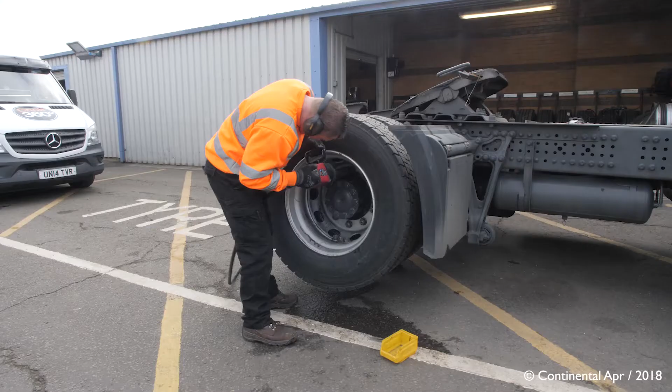What's more, if your vehicle does suffer from a detached wheel, your operator's licence could be at serious risk. That's why you need to stay on top of wheel fixing procedures and get it right each time, every time. During the course of this training video, we'll be showing you how to safely remove, service and remount a wheel on a truck, trailer, coach or bus.

And remember, if at any time during this training video there's something you don't understand, stop and ask your supervisor for further explanation, because you cannot have learning without understanding.

It's important to ensure that when a vehicle's booked in for a wheel removal, that everyone knows the correct procedures. That means parking it in a safe environment and above all else ensuring there's clear signage showing it's not to be taken out onto the road under any circumstance. It also means informing your site personnel in the traffic office and via the driver's notice board that the truck is not in service. When mounting or removing the wheel, be sure you follow all the standard working practices.

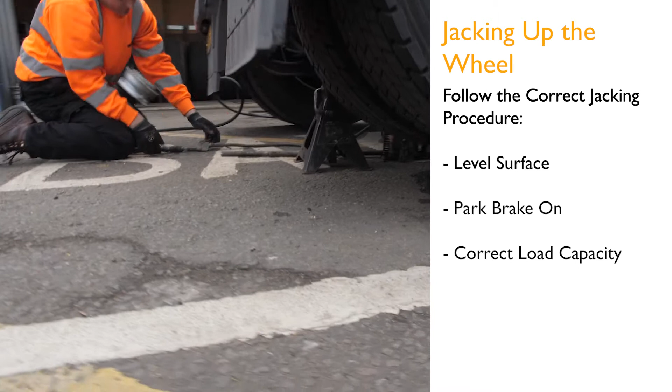For example, the initial lifting of the vehicle must be carried out using the correct jacking procedures. That means ensuring it's on a level hard standing surface with the park brake on and using a suitable jack with the correct load capacity. And if you've never removed or remounted a commercial vehicle wheel before, you must be properly trained to do it by a qualified tyre technician before starting the work.

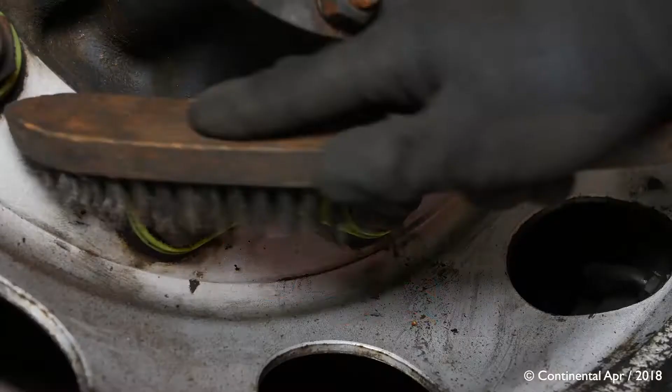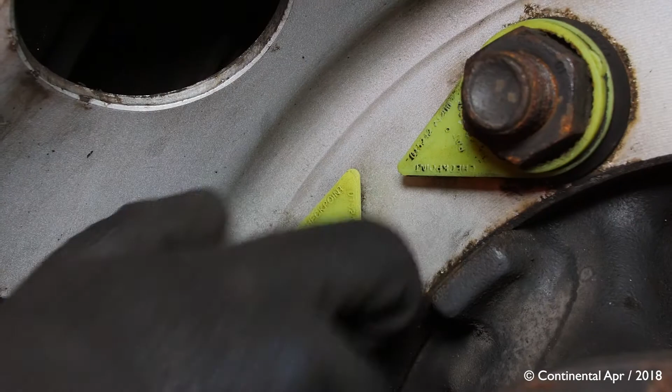First of all, before unbolting the wheel, make sure you clean the exposed threads of the studs with a wire brush or lightly lubricate them. Next, visually inspect the wheel assembly and check for any evidence that it may have been operating in a loose condition. If there are signs that a tyre has substantially deflated or has stood in a deflated condition for some time, the tyre or wheel components might have become damaged or displaced.

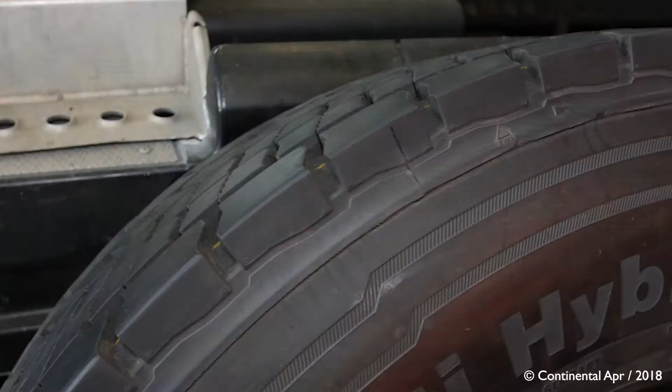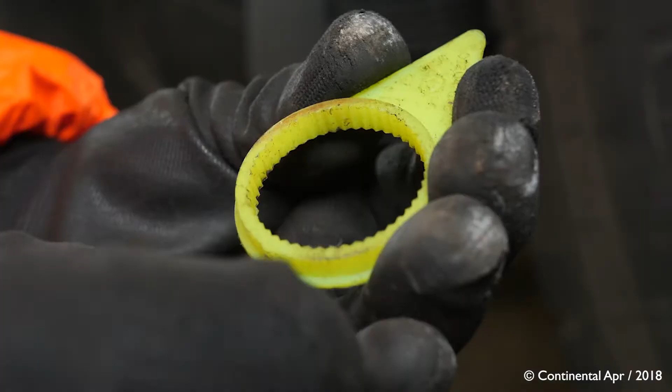If that's the case, remove the wheel assembly from the vehicle and the tyre from the wheel. Obviously, you'll need to examine the tyre to see why it's deflated and whether it's suitable for further service. And remember, each component part of the wheel must also be examined and replaced as necessary before being reassembled.

Now, in the case of aluminium alloy wheels, excessive heat from either a fire or a brake malfunction or a wheel bearing failure or a tyre failure or indeed any other cause could weaken the metal and render the wheel unserviceable. So if you do suspect an alloy wheel has been damaged by excessive heat, it must be removed from service immediately.

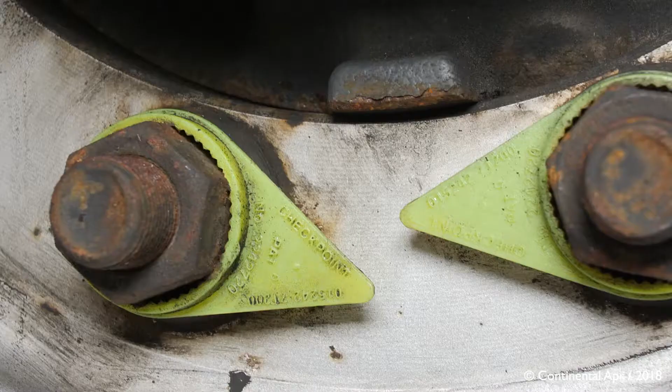Now it's time to make sure that any other loose debris around the wheel is removed, again using a wire brush. And if wheel nut indicators are fitted, check to make sure they're in the correct position. If they're pointing the wrong way, that could well be early signs of a potential defect, so you need to be vigilant for any abnormalities.

If the wheel is cracked or damaged, remember to deflate the tyre before attempting to remove the wheel. And should it be difficult to remove a wheel from the hub or drum, under no circumstances whatsoever ever hit the wheel rim directly with a heavy hammer. To remove a wheel, you should always use the suitable tools designed for the job. And if those tools aren't available, a protective wooden block and a soft-faced mallet may be used, but only with caution.

Once the wheel has been lifted off the ground, unbolt the wheel nuts with the air gun, making sure to follow all standard working practices and keeping the wheel nuts in a safe and secure environment so you can inspect them later. If you do experience any excessive tightness or difficulty in removing the nuts, this could also indicate a potential wheel security issue.

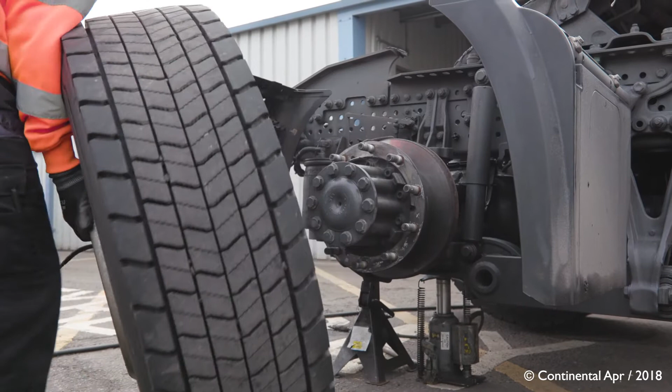Next, carefully remove the wheel from the hub assembly in line with manual handling procedures, taking extra care not to damage the stud threads on removing the wheel, whether it's a single or twin wheel assembly. So use levers or a cradle to lift and pull the wheels squarely off the hub. Finally, take the wheel away from the vehicle and fully deflate the tyre before carefully removing it from the wheel so it can be serviced and inspected.

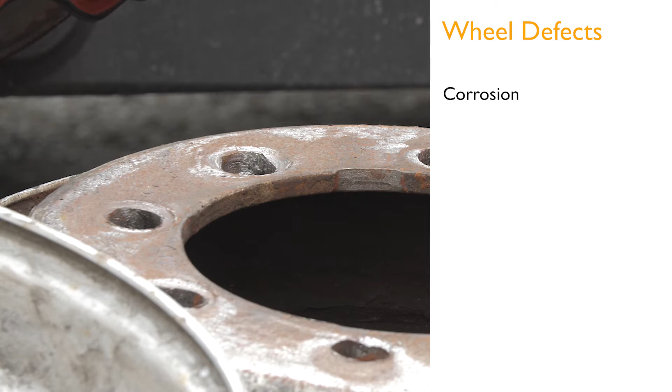Now that you've removed the wheel, you need to ensure it's safe and serviceable and that you've thoroughly checked it for any defects. And remember, any signs of damage or wheel deterioration, no matter how small, should be reported to the customer's maintenance supervisor. When inspecting the wheel, look for any signs of corrosion or pitting and remove any light rust with a wire brush.

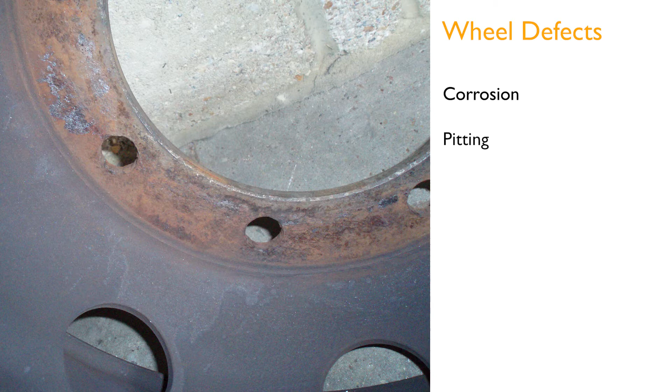If there's still any heavy pitting or corrosion after you've cleaned it, withdraw the wheel from service immediately and report it to the customer. Also, check for excessive wear around the centre bore of the wheel. Any significant wear in this area should also prompt the wheel's removal from service.

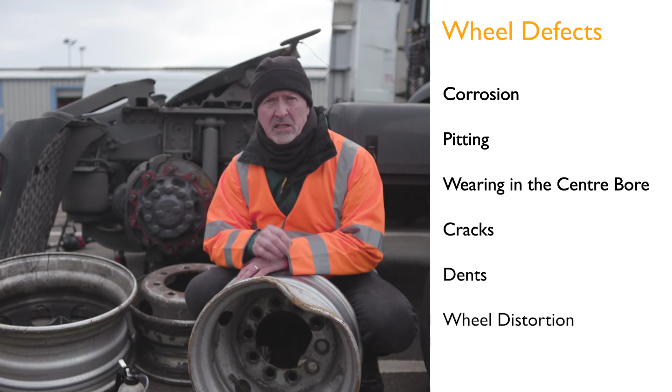And don't forget to closely inspect the wheel for any cracks or dents or wheel distortion too. And regardless of whether the damage is large or small, it won't be fit for further use in operation and the wheel should be taken out of service immediately. Once again, report this to the customer for further action.

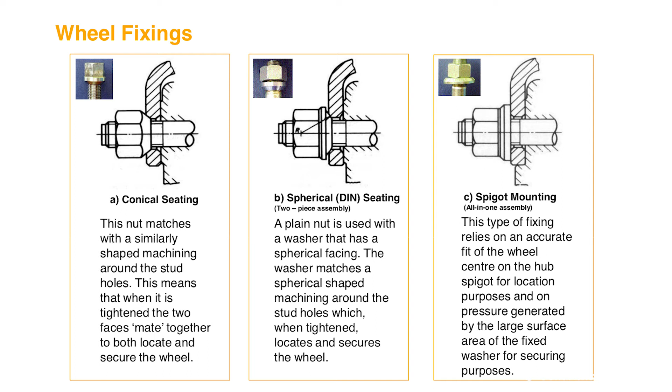However, if the wheel is undamaged and safe for operational use, a tyre can be refitted to it. But if you do find any defects, you must remove the wheel from service immediately and make sure it's not reused in any capacity whatsoever. Finally, remember that the replacement wheel should always be to the same wheel fixing type of the original, and pay attention to any further customer specific policy that could be in place.

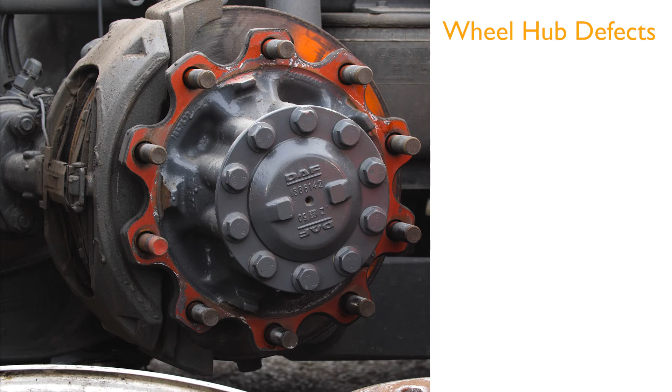Now that we know the wheel is operational, we can check the wheel hub. Firstly, inspect for any signs of worn spigots. This will be indicated by the wheel not centering correctly, which will cause an imbalance of the wheel, in turn vibration, resulting in loosening of the wheel itself. The spigots should also be free from loose material, corrosion, or any damaging defects.

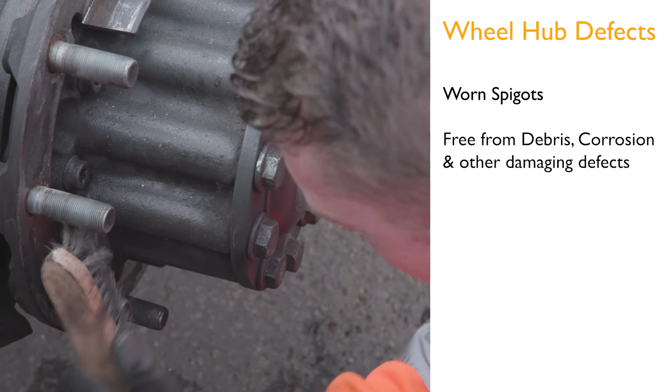Use a wire brush to remove the debris from all the areas of the wheel hub, but especially around the spigots and the mating faces, which should be spotlessly clean. If there is corrosion that can't be removed, or if there's any other damage, you must report it to the customer immediately and have the vehicle removed from service. If you're still not sure, contact the site, as it's better to have a vehicle parked up safely for further inspection than to have it involved in an avoidable accident out on the road.

You should now clean the wheel studs thoroughly and inspect them for any damage, for example, distortion, elongation, cracking or excessive wear to ensure they are reusable. And if they have been damaged, remove the vehicle from service and fit new wheel studs. Once again, make sure the customer knows that they're being replaced and that you've obtained a defect number.

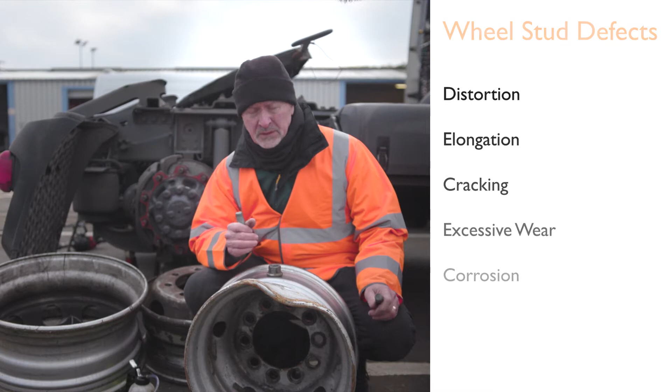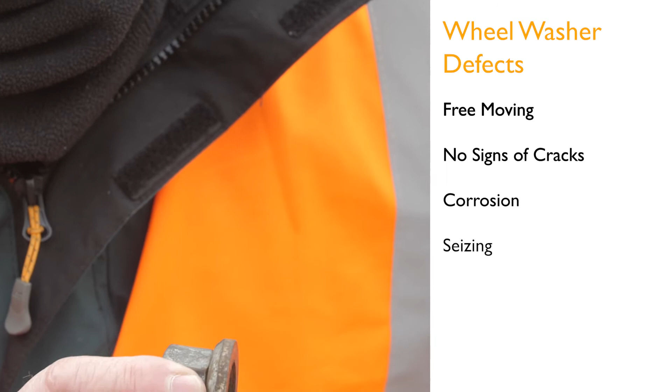Also, check the washer element of the nut. These need to be free moving and show no signs of cracks, corrosion or seizing. Also check the nut itself to ensure it's free from debris around the threads and that there are no signs of any damage. Remember, it's important that the nut should be able to move freely over the entire length of the stud when tightening by hand. And if you do need to replace the wheel nut, only use those that meet the original material specification.

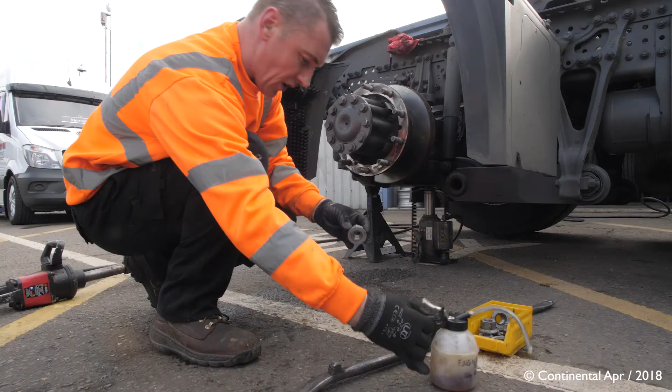If you find any of these defects on a wheel or its component parts, you must contact the fleet manager. More importantly, if you're ever unsure about a wheel's condition, contact a fleet manager, because it's better to act on a problem now than leave it to develop into something more serious later. Finally, if all the component parts have either been correctly serviced or replaced, you can now begin remounting the wheel back onto the hub.

Remember, before remounting the wheel assembly, ensure all the areas around the wheel and hub are thoroughly cleaned to ensure the mating faces on the wheel nave and the wheel hub are free from debris, as dirt or rust could end up between the mating surfaces and prevent sufficient clamping forces when the wheel nuts are tightened.

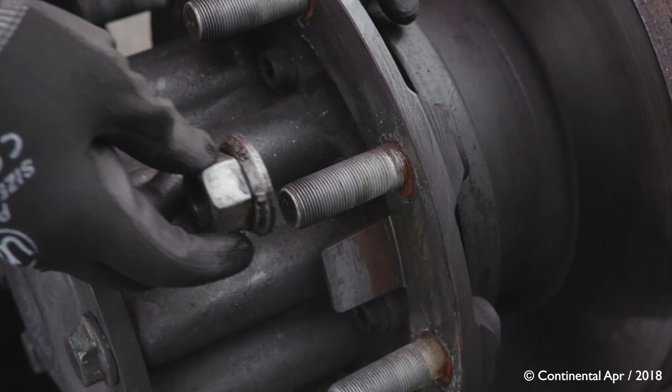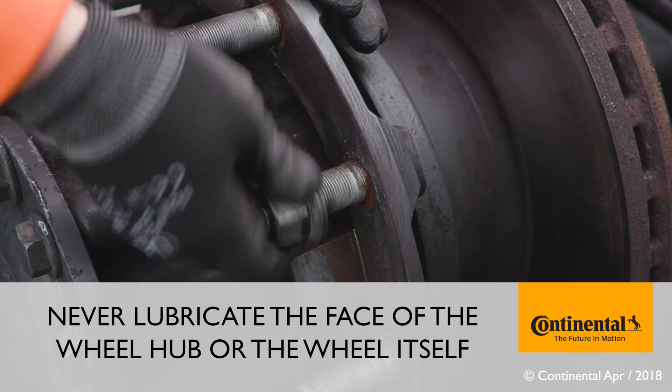Also, we need to make sure that the threads on the studs can reconnect. To check this, apply a recommended amount of lubricant to the end of the threads on the studs and nuts, unless otherwise instructed by the vehicle manufacturer, whilst making sure you don't lubricate the face of the hub or the wheel. In other words, lubrication should only be applied to the nuts and the studs. Once again, if any components are found to be damaged or unserviceable, replace them accordingly and obtain a defect number.

Now, carefully refit the wheel to the hub, taking care not to damage the wheel studs and threads, and making sure the valve access is aligned if twin wheels are fitted. Make sure also that you follow all standard working practices when doing this.

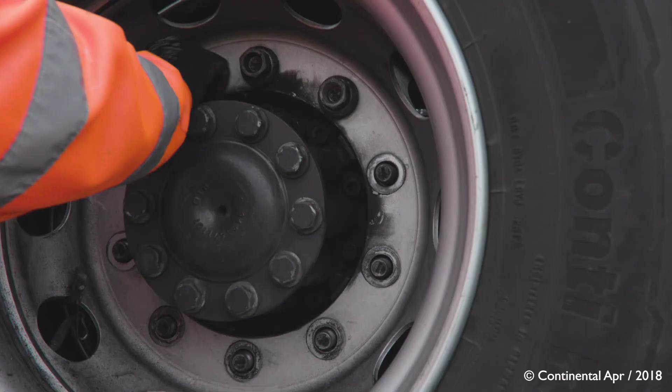Refit the wheel nuts manually over the full length of the stud, and if any excessive tightness is encountered during this process, then the stud and nut must be considered unserviceable and they should be replaced. And if an air tool is used, it's advisory to have it at the lowest setting. Above all else, never use an air tool for the final tightening.

Once the wheel assembly has been remounted on the hub and ensuring there's no damage to the studs, either hand turn the nuts onto the studs or use an appropriate wheel brace. And once the wheel assembly is secured on the hub, torque the nuts using a properly calibrated torque wrench, tightening the wheel nuts in the correct sequence. This tightening should occur after you lower the vehicle back to the ground. And remember, never be tempted to over-tighten as this will stretch the stud.

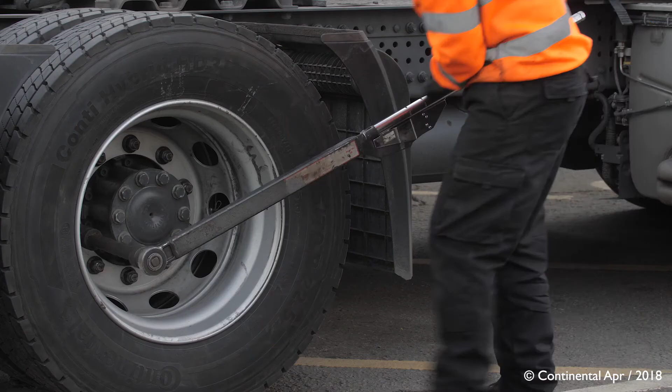On HGVs, after the initial wheel tightening has been completed, it's possible there could be what's called settlement in the studs. That's a relaxation of the clamping forces on the wheel. Therefore, it's vital that you repeat the torquing procedure after leaving the vehicle to stand for at least 30 minutes or after it's travelled for a distance of between 40 to 80 kilometres, 25 to 50 miles.

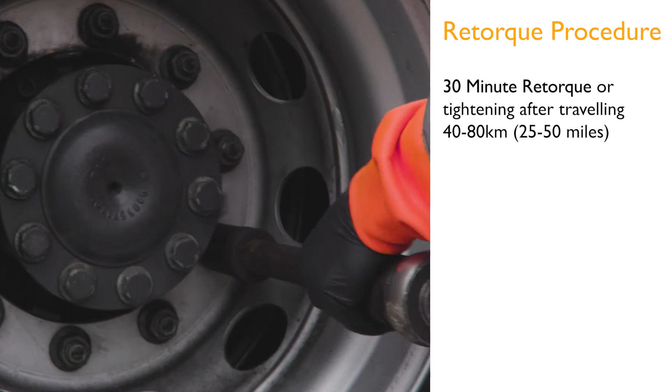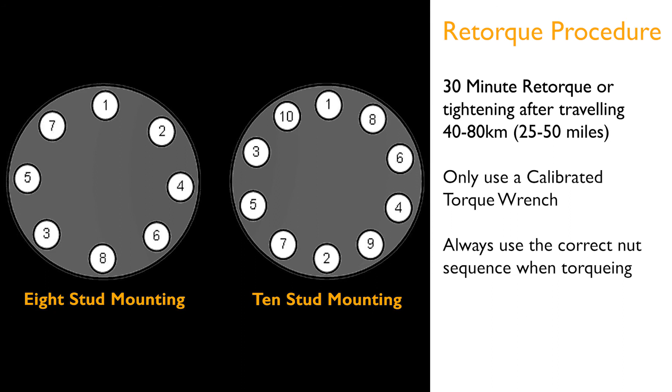Again, only use your calibrated torque wrench and not extensions or wheel nut spanners and spiders. And again, the correct nut sequence must also be applied. But above all else, under no circumstances whatsoever should wheel nuts be slackened off and then retightened during the retorque process.

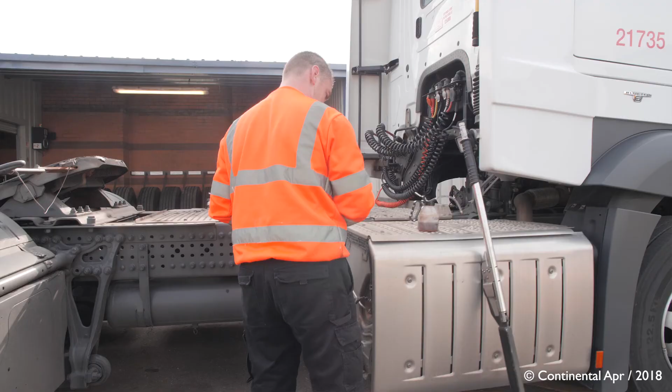Finally, after retorquing has been completed, refit the wheel nut indicators if required, making sure they point to the correct position. Then it's time to return all your equipment to storage, reduce the torque wrench setting to 0, and finally, remove any working signage, complete the appropriate paperwork, and make sure that appropriate copies are given to the relevant parties. The truck is now operational once more and it's safe to go back on the road.

But always remember, routine in-service checks should take place afterwards and all wheel fixings rechecked for tightness in accordance with the operator's and the vehicle manufacturer's preventive maintenance schedule. So there you have it, the complete process of removing, inspecting, servicing and refitting a wheel. And now you have the knowledge to make sure the vehicles you service are not only safe for those driving them, but also for those sharing the road with them.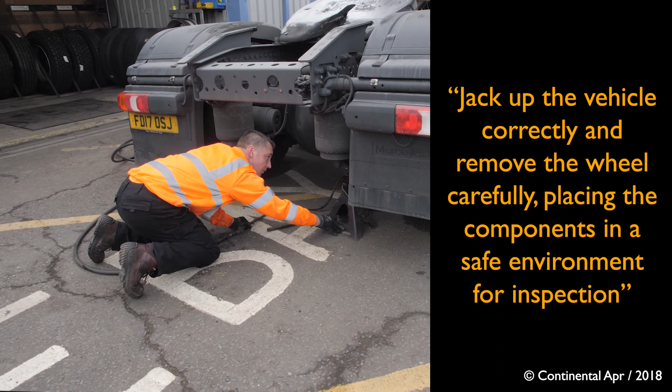And to finish, here are some of the key points to remember. Jack up the vehicle correctly and carefully, and remove the wheel from the wheel hub, placing all the nuts and studs in a safe environment so you can inspect them later. Remove the tyre from the wheel, making sure to follow all standard working practices and check for any defects, corrosion, cracks, dents or anything else you find of concern. And if you do find any defect, take the wheel out of service immediately.

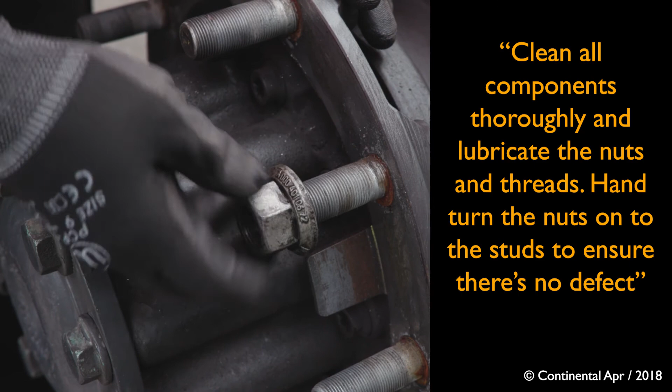Clean all the parts thoroughly to remove any loose debris and lubricate the nuts and threads. Make sure the wheel nuts are usable by twisting them onto the wheel fixture by hand until you see the top of the head. However, make sure you check your customer's policy as it may vary. Make sure you don't lubricate the wheel hub face or any other parts of the wheel.

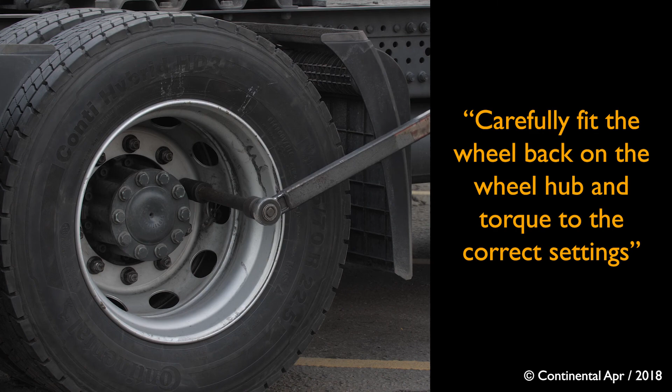Fit the wheel back onto the wheel hub, carefully following all standard working practices, and torque the wheel nuts to the correct setting. Then, lower the vehicle and let it stand for at least 30 minutes, or after it's travelled a distance between 40 and 80 kilometres, 25 to 50 miles, before retorquing. This will ensure the clamping forces are properly maintained.

Finally, if you're ever unsure about anything regarding wheel fittings and fixings, contact the fleet manager or a qualified tyre technician and talk things through. It's always better to be certain than unsure.